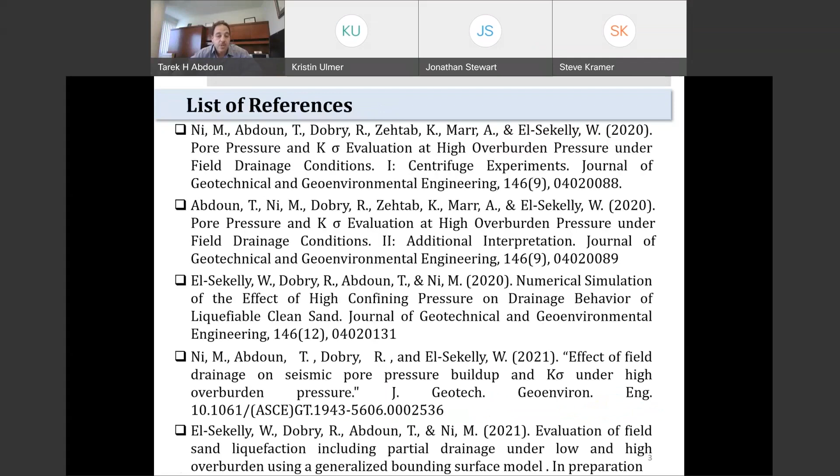I'll be briefly going over the research. This work has been going for the last 4 or 5 years. There are 4 journal publications which cover most of the topics. So if anybody is interested in more details of what I'll talk about, there are 4 journal publications, all of them in ASCE, and there is a 5th one currently in preparation, which will be coming soon.

This is the outline of the presentation. I'll start with a brief background on what was the motivation. I'll do that very quickly because everybody here is very familiar with the topic. As John mentioned, this is something of interest to us as a community. So I'll be giving just a brief introduction.

Then I'll start talking about our experimental work, which includes both single drainage and double drainage models, and analyze this data to get some insight on the values or factor of K-sigma based on the centrifuge results, as well as the soil properties, how they change. This coefficient of consolidation and compressibility depend on the confining pressure as you go. Finally, I'll be presenting some numerical simulation, which we ran using FLAC3D to try to get more in depth and evaluate also FLAC3D, which is commonly used in practice to estimate the response of liquefaction, both under low and high confining pressure. And finally, some conclusions and talk about our plan for continuing this work.

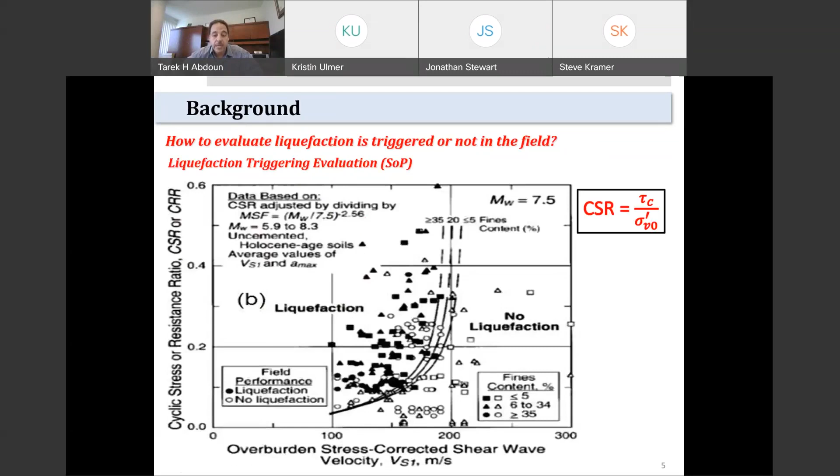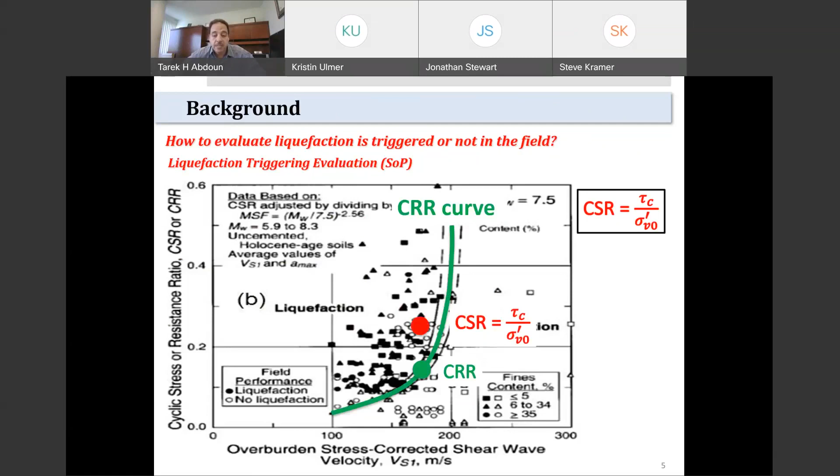So going to the quick background, how we evaluate liquefaction, everybody's familiar with this. It's basically using what we call liquefaction charts. Liquefaction charts can be based on shear wave velocity or CPT. More and more we are going to using in practice the CPT-based charts for very good reasons. But basically, both have the same concept. You are looking at what we call a cyclic stress ratio for the soil and compare that with the CRR, which is a cyclic resistance ratio curve. You have a curve which separates liquefaction from no liquefaction condition. You calculate your CSR. If it's above the curve, then that's an indication which is higher than CRR. That's an indication that the soil or liquefaction is predicted, is going to be triggered.

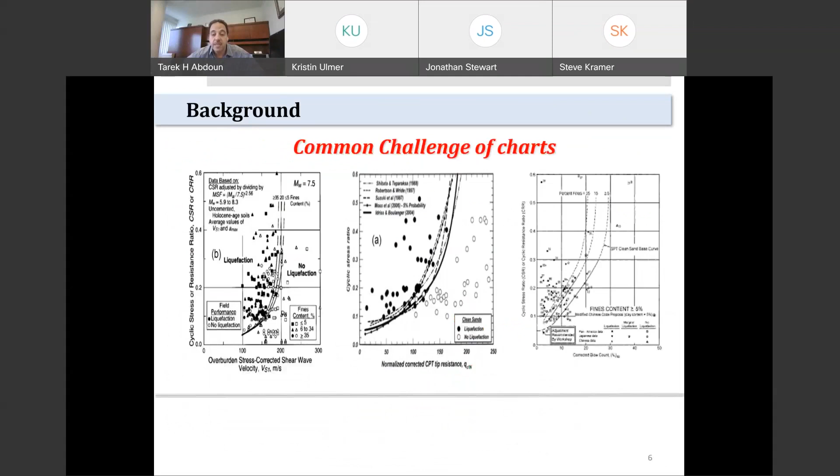That's the basis for using the chart. These charts have served us very well in practice. The only challenge with this chart is that they are more or less validated for shallow conditions, typically less than 1 atmosphere. There are a few points between 1 and 2, but in general the case histories compiled to develop this chart are all lower than 1 atmosphere.

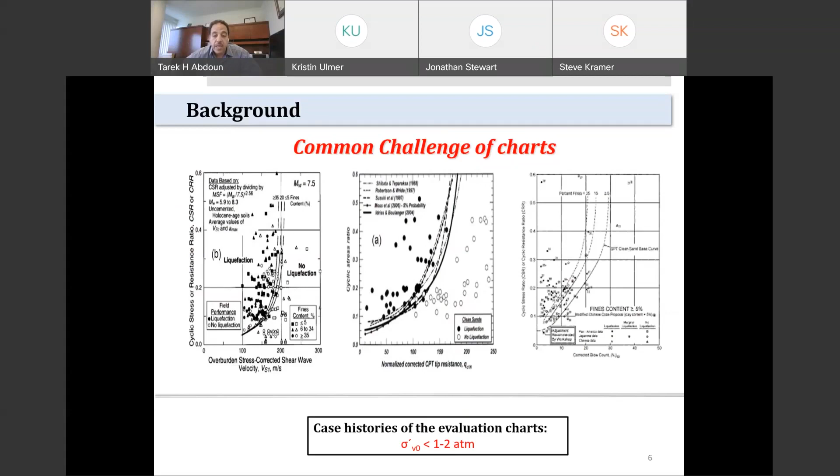But we have cases and conditions where the soil condition might be in the free field less than 1 atmosphere or around 1 atmosphere, but for the same soil, for a case like a high dam, if you calculate the confining stress, it's about 8 atmosphere or higher. So how can we evaluate the liquefaction potential, and are the same charts valid or not?

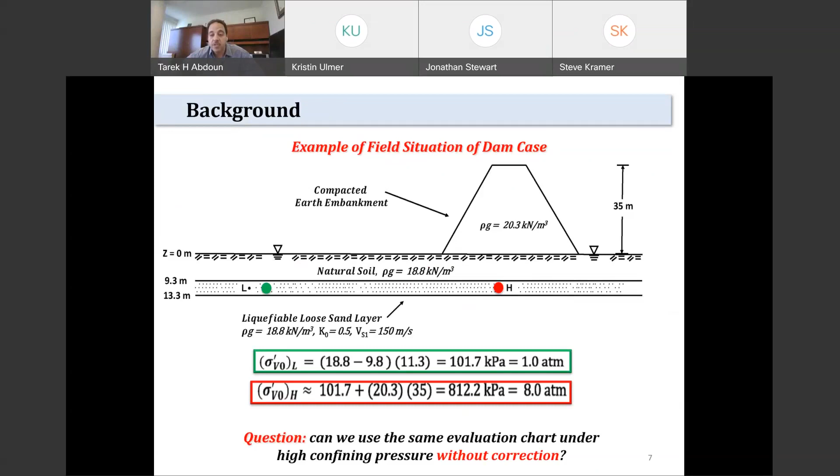There's a lot of work being done on that, and that was a question of interest at the last meeting with the National Academies Committee, looking into this, and they were looking for insight on how we can use this chart and the validity of this liquefaction chart curve at high confining stress.

There is a recommendation for how to use this chart. It's basically looking at the current curve and multiplying it by a certain correction factor, which we call the K sigma coefficient. Typically right now the K sigma coefficient is based on small scale testing, and the recommendation for K sigma is usually less than 1, which means the curve for CRR at 6 atmosphere is a lower curve, meaning the soil is weaker and has higher potential for liquefaction at high confining stress.

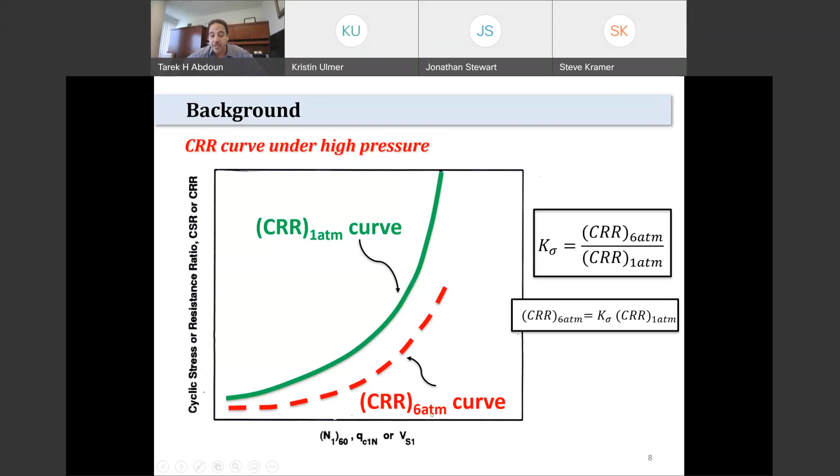There are two typical recommendations for this correction factor, K sigma, based on Youd et al. 2001, or the more recent work by Idriss and Boulanger 2008. Both give different factors under different soil conditions.

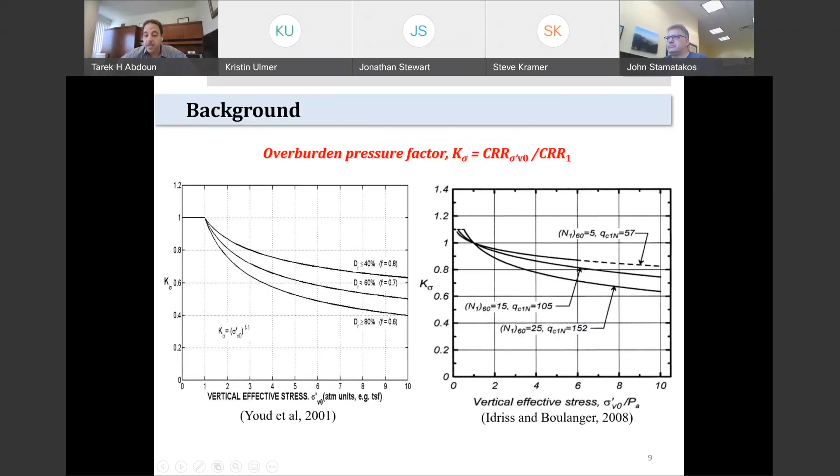If we take one as an example to get a feel for it, this is the curve for relative density of 60%. If we look at something at 8 atmosphere, you'll get K sigma, as I said, less than 1, ranging between 0.55 to 0.85 depending on which method you're using. So as you can see, there's a lot of variation between the two methods.

Also, as I mentioned before, there isn't really case history in the field to validate this. It's all based on undrained small sample tests, which is what's available for us to use, with no field cases. So this was mainly the motivation for this study, to get it started.

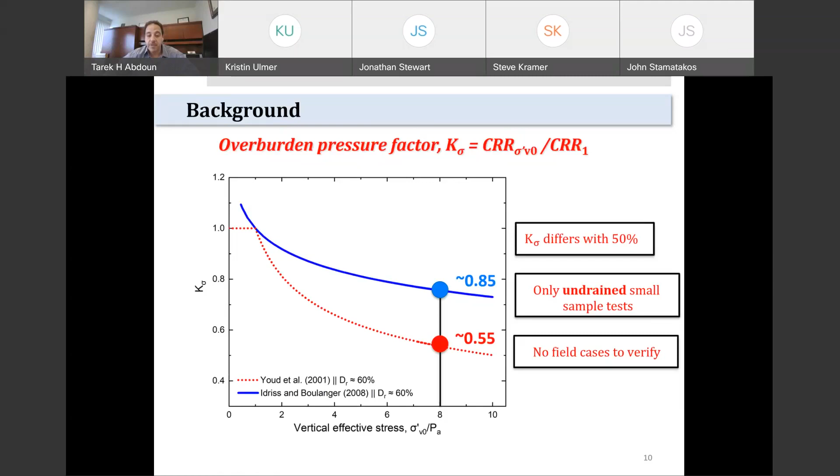We wanted to conduct centrifuge tests in this high range of confining stress to provide some field cases or case history to validate this method and understand more in depth the behavior of the soil under this condition. So we're really looking at what's the physics behind the phenomena as we liquefy and shake the soil and try to trigger liquefaction.

So centrifuge testing or simulation is very good for this kind of study because it gives a lot of insight on the physical behavior. So we conducted a series of centrifuge tests. I'll start by discussing the single drainage type of test.

So as we said, we are looking at comparing the behavior at low confining stress and high confining stress. Our work is mainly looking at doing tests at 1 atmosphere and 6 atmosphere. This is the setup, basically simulating a 5-meter prototype in the field.

It consists of a sand layer topped with a coarse sand layer, and on top of that, granular lead shot. It's basically particles made out of lead, so it's heavier to help with increasing the confinement, but it's the same size as the sand particles. So it's a granular material that behaves similar to soil.

We did two setups, one at 1 atmosphere, and the second one here on the right at 6 atmosphere. Both have the same prototype depth of about 5 meters of liquefiable soil. We vary the soil properties from 45% relative density to 80% relative density, so we see the loose and dense sand. It's heavily instrumented with accelerometers, pore pressures, bender elements to characterize the soil, as well as LVDTs. These models were built in a laminar container to provide the shear beam behavior and reduce the boundary effect.

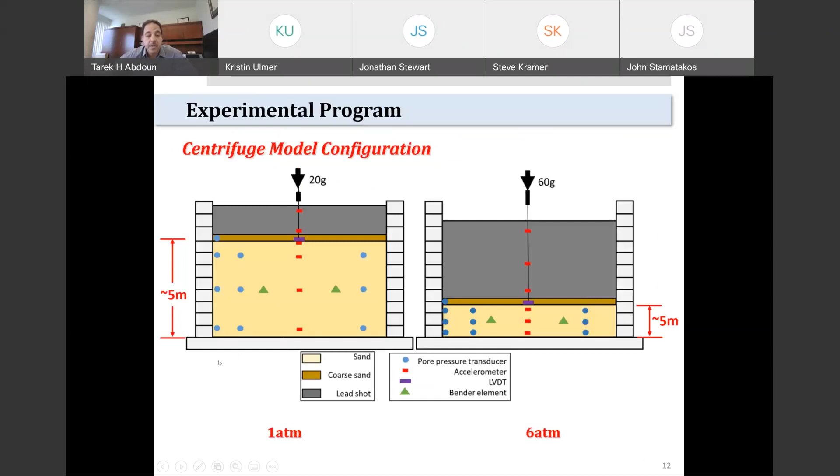All of them single drainage, as you can see here, it's only allowed to drain upwards. The boundary at the bottom is impervious. So you have 4 tests. The name of the test explains it. 45 is the relative density of the test, 1 is the confining stress, which is 1 atmosphere, 6 is the 6 atmospheres. And the second set of tests is 80% relative density, again 1 atmosphere and 6 atmosphere.

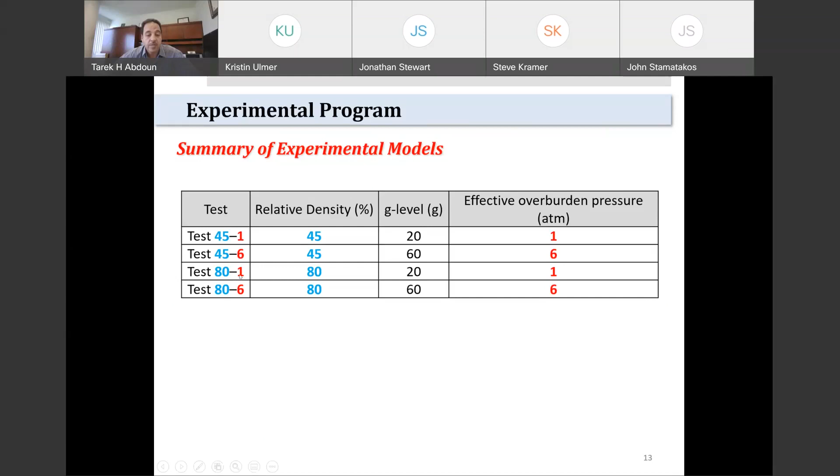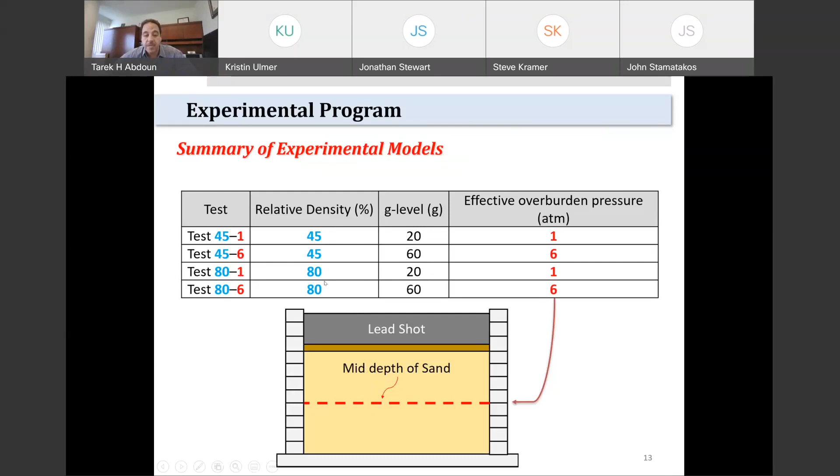The confining pressure is measured at the center of the layer, so it might vary a little bit as you go deeper or higher, but at the middle of the layer, where we focus on everything we are doing, is where we are measuring this value. And the relative density we're talking about is after spin up, so this is really at the high confining stress. These are the values of relative densities we have.

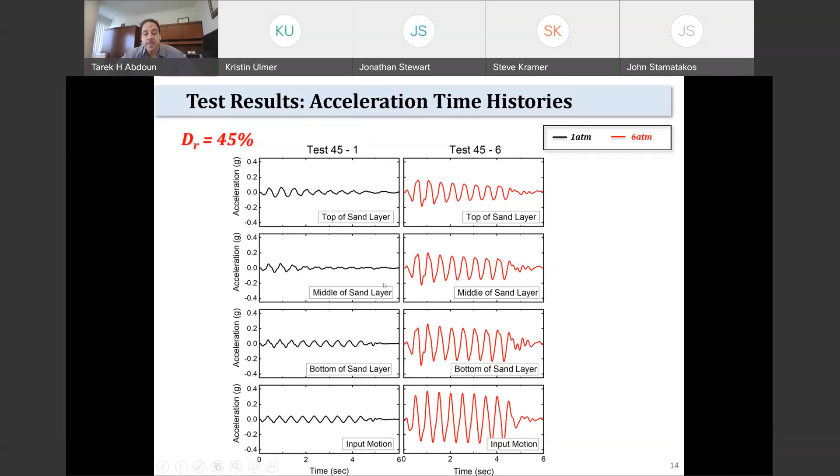And you can see how the acceleration propagated as the soil liquefaction develops or the soil softens, you can see the de-amplification of the acceleration.

This is a pore pressure buildup, looking from the bottom going upward in the liquefiable layer. As we said, we are targeting about 0.8 or 0.9, so this is about 0.8 or 0.85 measured at the bottom of both layers. So both of them reach the high value of RU we are targeting.

And you can see as you go at middle depth, the 1 atmosphere maintains a high pore pressure buildup, while the 6 atmosphere starts immediately dissipating, or couldn't even build up enough pore pressure. And again it continues with depth, so this is basically 0.8 or so at the bottom, and at the top about 0.4 RU. And for the 6 atmosphere, it's again 0.8 at the bottom and about 0.1 near the top.

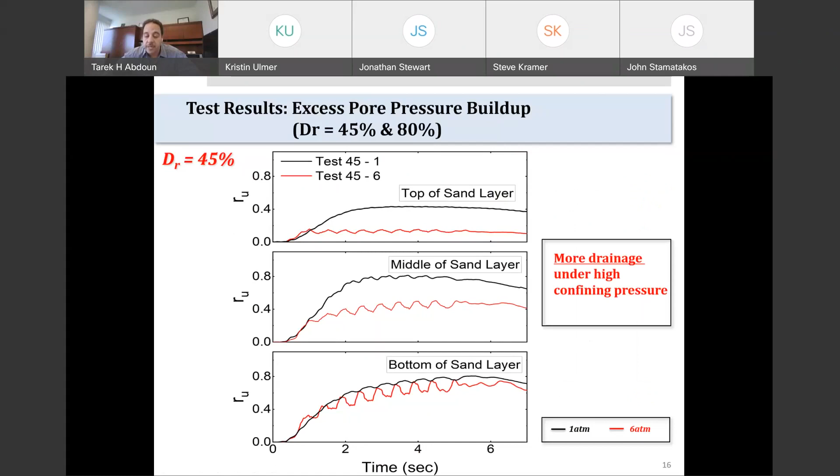So immediately from this result, we start seeing the impact or the effect of drainage. There was an indication of it, so we start looking in depth more into this, which would be clearer if we look at the isochrones of the pore pressure buildup.

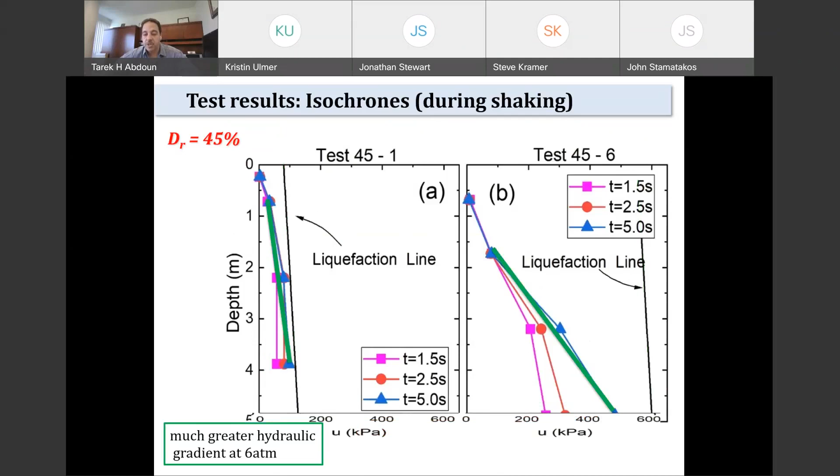So if we look at the gradient, as I said, it increases with depth in both cases. The maximum was measured at the bottom, but what's interesting for us is really the gradient of that isochrone. If we look at the hydraulic gradient, which is the slope of this isochrone, you can see that the gradient is much higher in the 6 atmosphere, and the gradient is 1 over the slope. So the higher the gradient, following Darcy's law, this means more drainage is occurring during the shaking of the model. That was the second indication that flow is moving from the bottom up during shaking for our test.

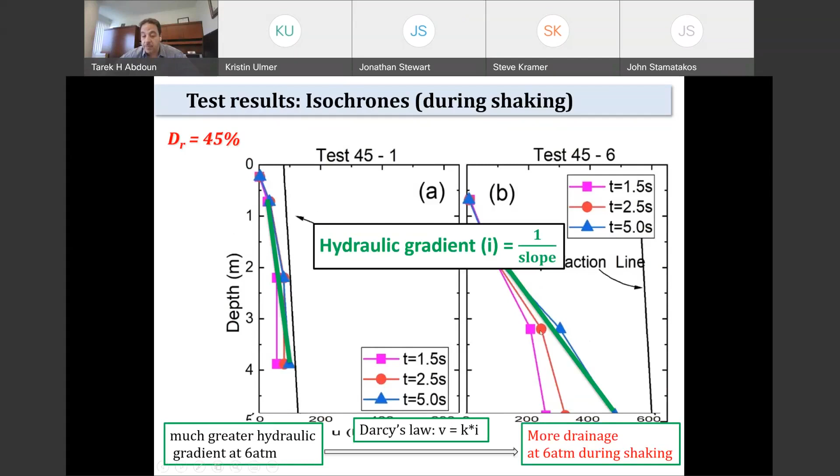We start looking into the results and comparing them with the small scale testing, which we have been doing with our colleagues at GEOCOMP. So we ran a series of stress and strain control tests at GEOCOMP using the same soil, and we did it for the relative density which we are using in the centrifuge, where in this case we are comparing with the 45.

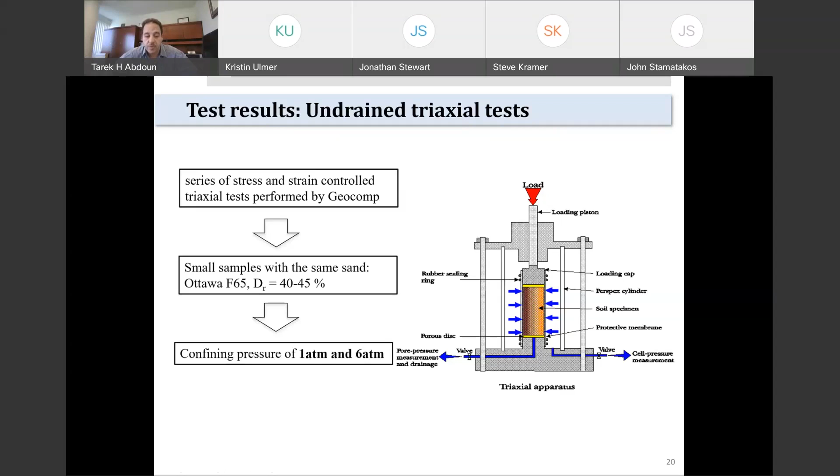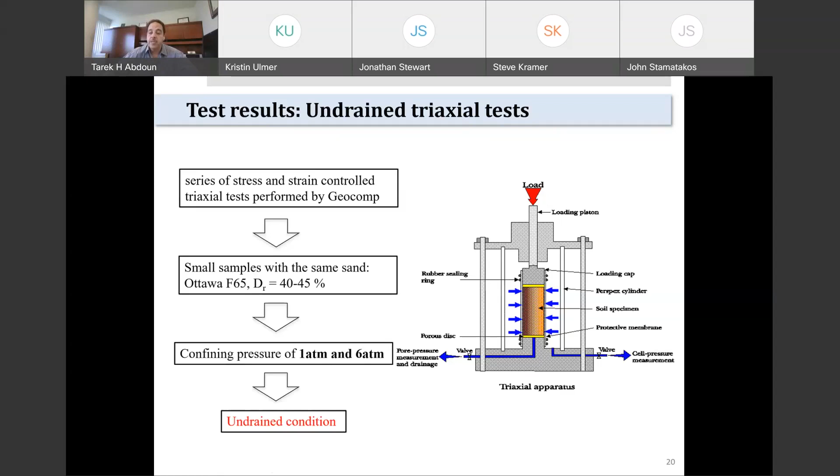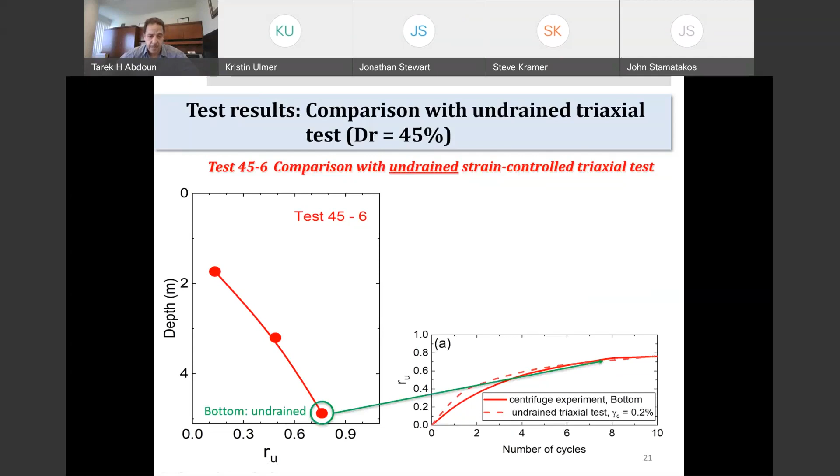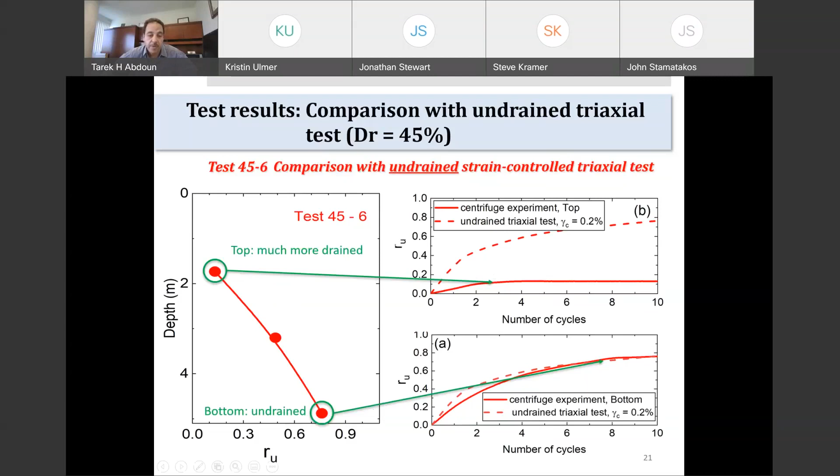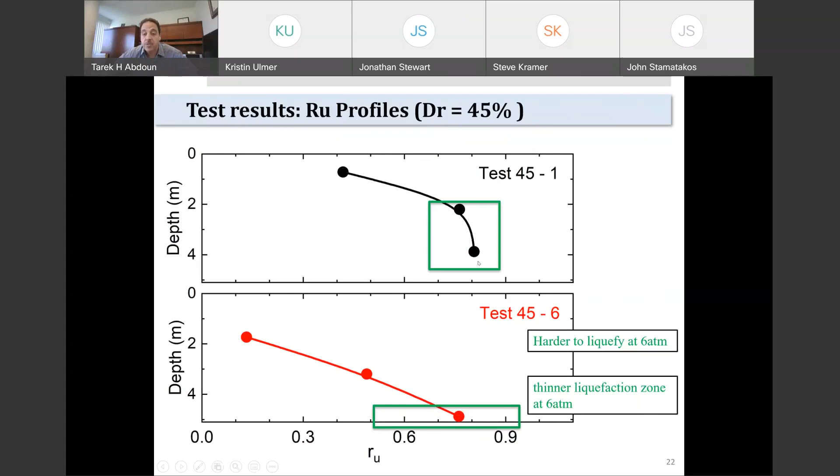Another observation, looking at the isochrones: in the 1 atmosphere case, the buildup of high pore pressure covers a zone of about 2 to 2.5 meters. In the 6 atmosphere case, it's almost a point near the impermeable boundary, with a very steep slope, basically draining quickly or highly. So the observation from this is that it's harder to liquefy at 6 atmosphere, based on what we observed from the centrifuge. And even if you reach liquefaction or close to it, the zone of high RU is much thinner than expected, or than what you'd get in a much shallower layer.

We took that further and started looking more into the effect of drainage. So we repeated this test, but now with double drainage, allowing drainage to occur both at the bottom and at the top. We repeated the same models shown earlier, again at 1 atmosphere and 6 atmosphere, but added a drainage boundary at the bottom, so now the soil can drain upward and downward during shaking. We repeated the same test with the same conditions and confining stress.

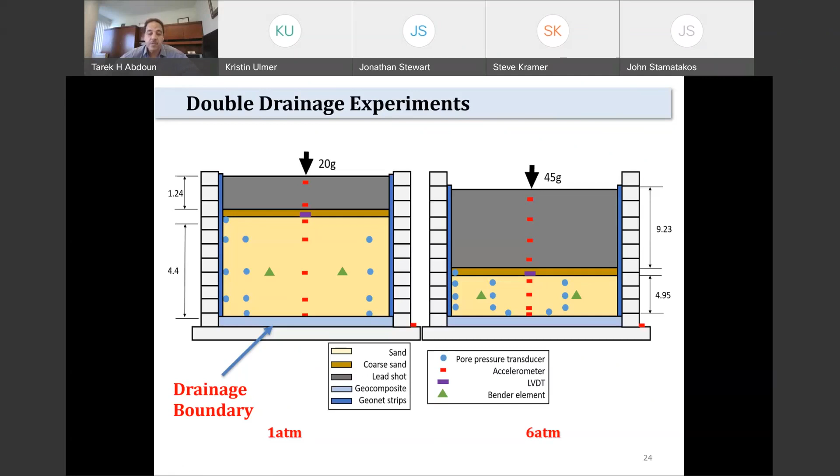We started by repeating the test with the same input motion, the same motion which generated almost liquefaction in the single drainage case. We used the same input as a starting point to see if we'd get the same buildup, or if the change in drainage would make a difference. This is the first comparison.

If we look at the 6 atmosphere case, for the same level of shaking but now with double drainage, initially you were reaching values of about 500 kPa. Here you're hardly reaching 100 kPa, so almost no buildup of pore pressure because of the double drainage effect. This shows a significant effect of drainage at high confining stress, more significant or apparent than what we saw in the 1 atmosphere case.

We repeated this test, though I'm not showing it here, to reach the high confining stress, but we had to apply much more input motion to build that up so we could calculate our K sigma. For the sake of time I'm not presenting that, but we repeated the same test with a new model version and used higher input motion. We were able to capture high values of RU, but as I said, it required higher shaking input.

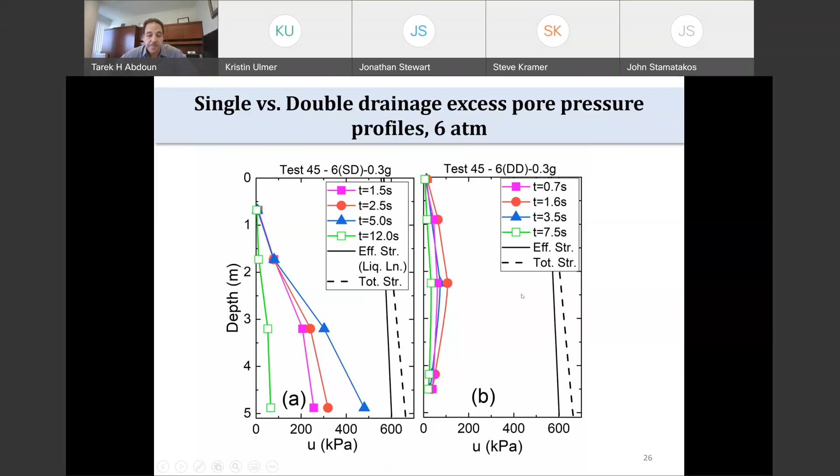So we used this data from all 8 tests to start looking into the values of K sigma based on the observation for the centrifuge, which simulates more or less the field condition.

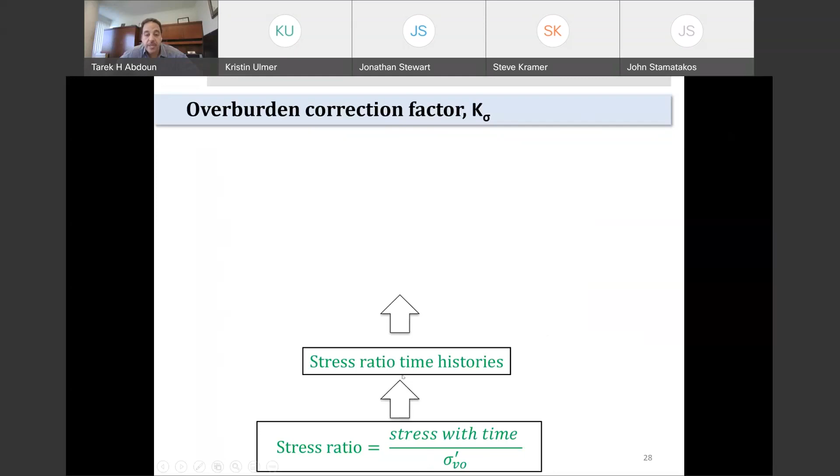Typically to calculate K sigma, just to refresh everybody's mind, you calculate the stress ratio, which is the stress with time over the effective confining stress. If you have the stress ratio histories, you can calculate your CSR, both for the 1 atmosphere and 6 atmosphere. So it's a direct calculation. And the ratio of this CSR at 6 atmosphere and 1 atmosphere will give you the K sigma.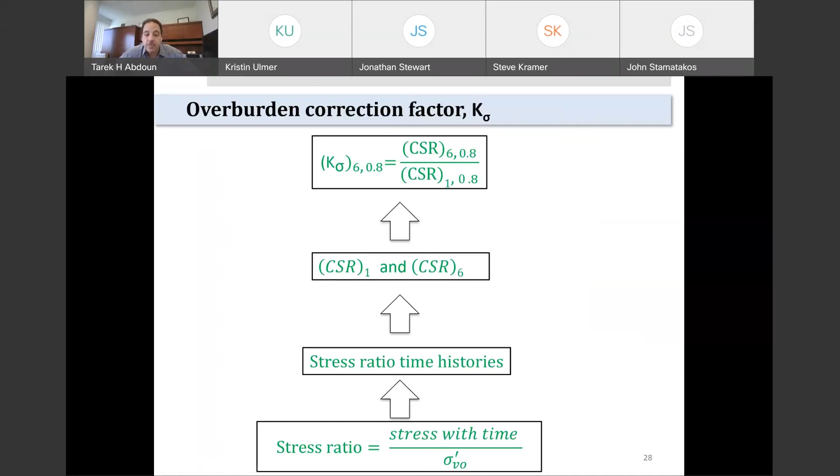So we use that to calculate K sigma for the centrifuge test. This is an example of the stress ratios measured in our test. Again, the black curve is 1 atmosphere, this is for the 80% relative density, and the red curve is 6 atmosphere. As you can see, the stress ratios in the 6 atmosphere are higher than the stress ratios for the 1 atmosphere, which is opposite to what is being estimated based on the undrained behavior.

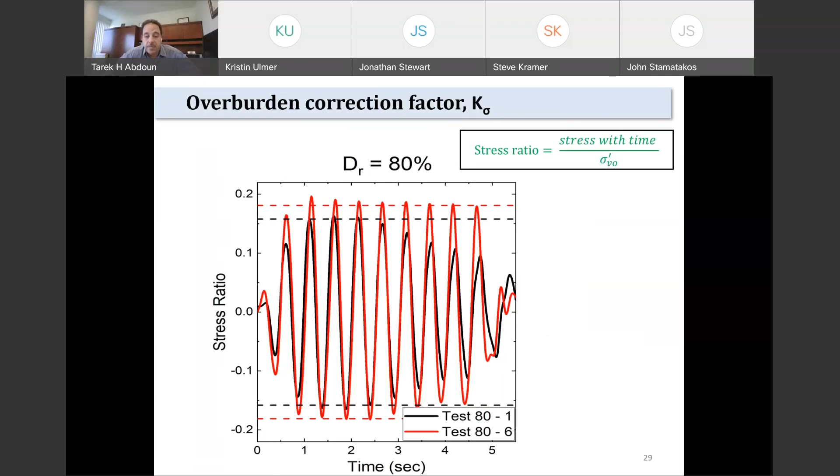So if we take these values, and again we did it for the 45% and the 80%, and use that to calculate the K sigma, you get values of about 1.3 and 1.15, depending on the condition. This is all for the single drainage.

So it's obvious from this measurement that the higher the confining pressure, the soil is draining faster, and we'll look into why that's happening. Because the soil is draining faster, you are not building pore pressure as fast as being estimated based on the undrained condition.

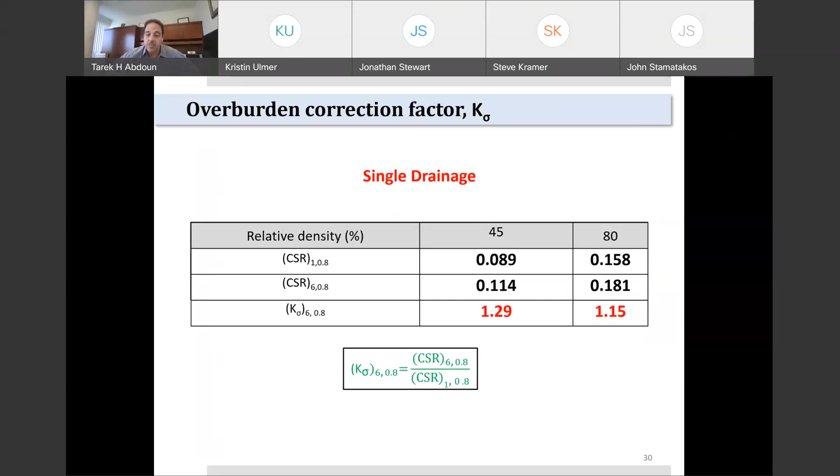So we compare these values. The blue values are what's being estimated with the current curves from state of practice. As you can see, if we look at the 45, what we get from the centrifuge is about 1.3. The current K sigma values are about 0.7 or 0.85.

We went back and calculated what K sigma would be if we use our undrained triaxial test. So if the assumption of undrained behavior is valid, what would K sigma be? The values are very comparable to what's being given by Idriss and Boulanger, about 0.85 or 0.84. For all practical purposes, it's the same number.

So basically the issue is the method is correct, but is the assumption of undrained the right assumption for high confining pressure? Based on the observations, it's very valid and stands strong for low confining pressure. But as soon as you go to high confining pressure, it might be a very conservative assumption. To assume the soil is still undrained is conservative, not utilizing the soil behavior to the fullest. The soil is draining, and if it's draining, it's reducing the potential for liquefaction. That's why K sigma being measured is higher than 1.

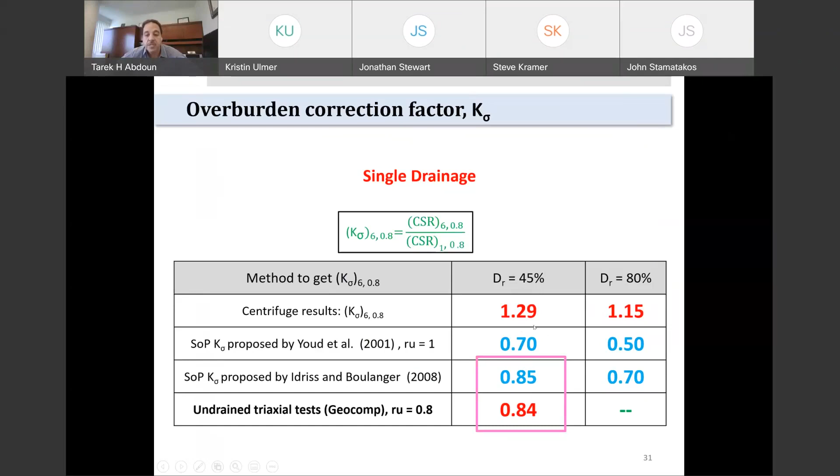So we use that as an exercise to look at how that would impact the prediction of whether the soil will liquefy or not in our test. Again, the centrifuge test is like a case study. We use the CSR we have for our centrifuge test at 6 atmosphere and divide that with the K sigma values, both from the chart as well as what we calculated based on the centrifuge. If we use the chart, that would estimate that the test we did would liquefy.

And if you recall, we never liquefied. We reached high RU, but we never liquefied. If we use the measured K sigma, it predicts that the tests we conducted are not expected to liquefy, and that's really what we observed. We reached about 0.8, and actually it reached that only at the boundary. The rest was much lower than that. So it certainly didn't liquefy in that test.

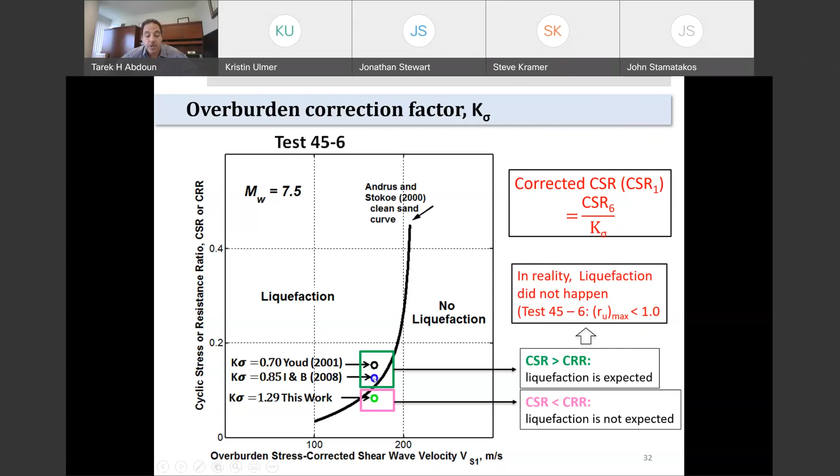So that gives you a feel for how that K sigma value might make a difference in predicting if the soil is going to liquefy or not. You might be conducting unnecessary remediations in certain conditions because of underestimating the values for K sigma.

This is the same table from before. We added to it the value from the double drainage. As I mentioned, we did the tests again and we reached the high RU values, and we repeated the same process, and you get K sigma again about 1.3 for the double drainage. So it confirms what we have been observing, the single drainage is also being shown in the double drainage.

So in quick summary of what we have observed in the centrifuge test, K sigma seems to be higher than 1 because the soil behaves more drained at high confining stresses.

K sigma decreases with relative density. That's the same trend the charts from the state of practice show, which confirms that trend.

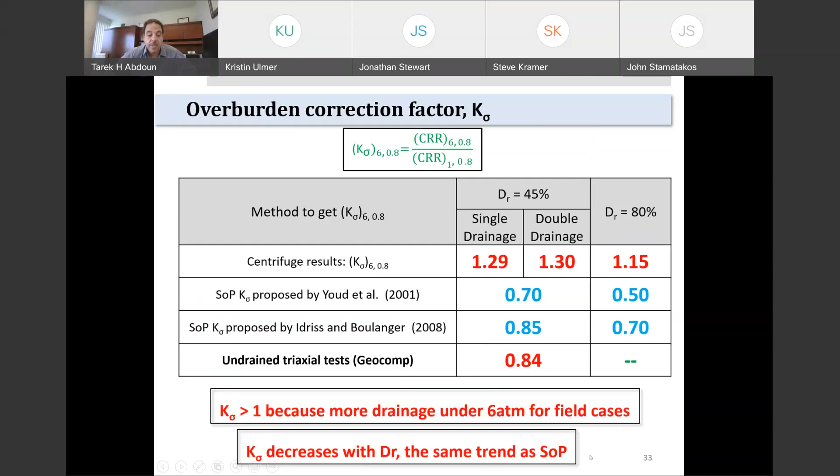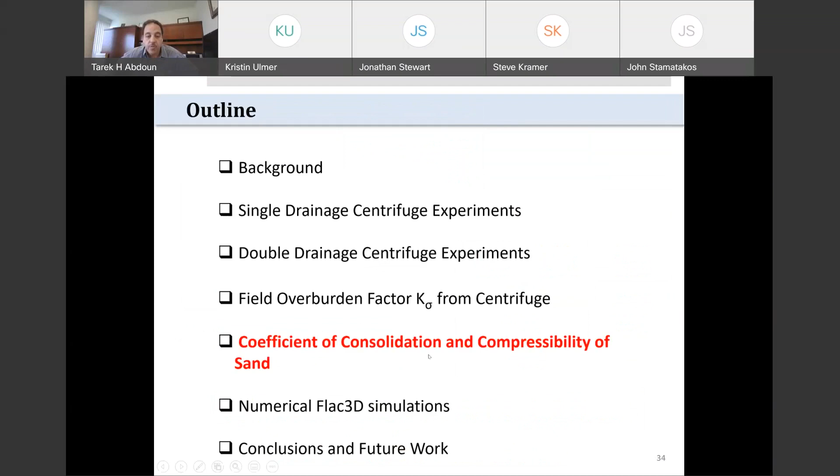If the soil is behaving more partially drained, then the stiffness of the soil or the coefficient of consolidation would play a very major factor. So we started looking into what values we have for the coefficient of consolidation, because the CV values we calculate from the physical test or the centrifuge should be consistent with the behavior of whether the soil is draining or not. That same trend has to be shown in the centrifuge to give credibility to the results.

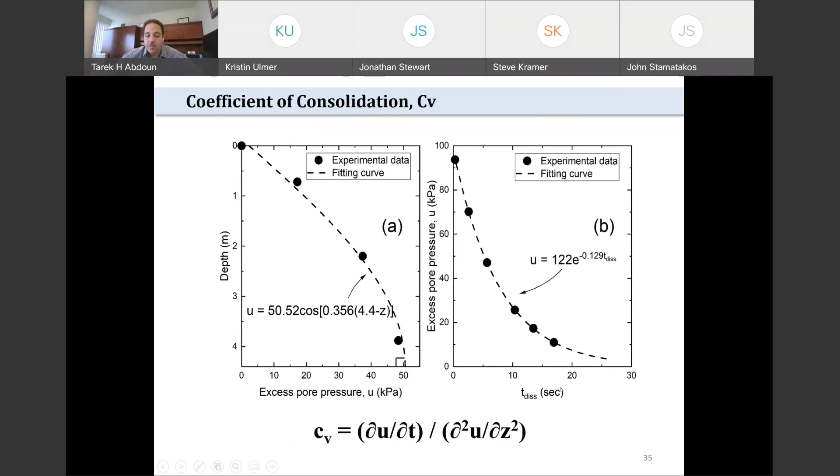So we went back to basic soil mechanics to see if things add up and all the puzzle pieces fit together. We used the data from the centrifuge to calculate the CV using consolidation theory. On the right-hand side is the dissipation curve, which we used to get the time for the soil to consolidate, and from that calculated our CV value.

If you have CV, you can calculate M prime, which is a volumetric stiffness, both for 1 atmosphere and 6 atmosphere, and we did that. Based on basic soil mechanics for sands, it's supposed to be around the square root of the change in confining stress. So for our case, for 6 atmosphere, the change in CV or M prime between 1 atmosphere and 6 atmosphere should be about 2.5 times roughly.

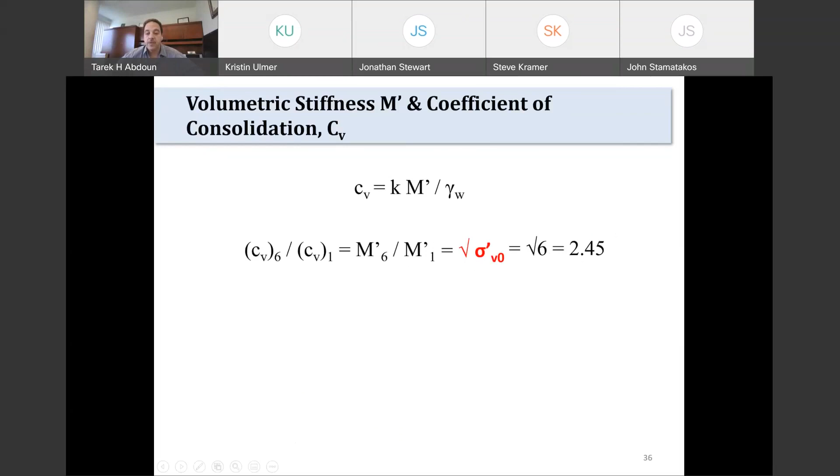We did our calculation for CV and M values in the centrifuge, and for all the tests they varied somewhere between 2.4 and 3.2 or 3.4. As an average it's about 2.7, which is very comparable to the value from basic soil mechanics. This explains that the higher the stiffness of the soil, the faster it drains. That's why soil at high confining pressure, even the same soil at the same relative density, is much stiffer and drains much faster.

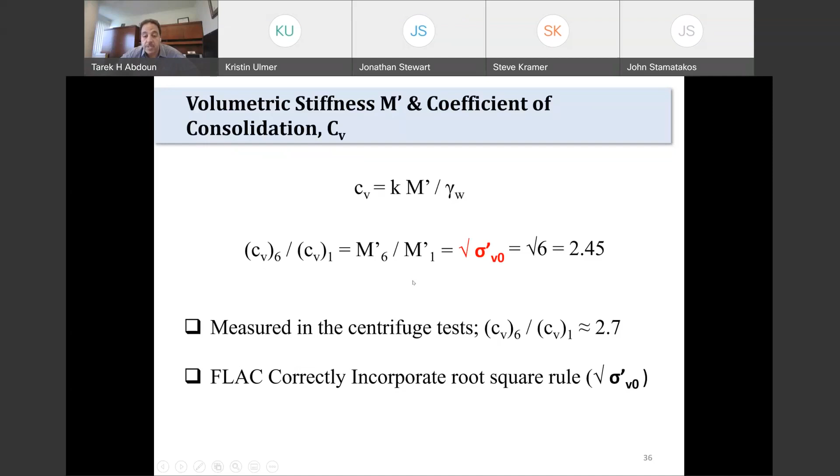We were also interested in using FLAC for the simulation, since that's what most people use in practice for liquefaction prediction. FLAC correctly incorporates that square root rule, so for the same soil at the same relative density, the value for CV or M prime changes by the square root, which is already built into the code, so you don't need to make any correction. It takes that into account, and we'll see that when we look at some of the simulations done.

We wanted to develop a way for practitioners to use this method to properly estimate the stiffness of their sand, without needing to run a centrifuge test every time. So the GEOCOMP team is leading an effort to develop a new test, a triaxial sand compressibility test, to be able to predict this value.

This is a result from this new procedure they're developing, where they run the triaxial test undrained, and after reaching high RU, they open the drains and let it consolidate while measuring the change in stiffness or volumetric change of the soil, estimating the volumetric stiffness. This work was led by the GEOCOMP team, but I wanted to show that we're also looking into providing tools for practitioners to use this information, so they don't need to go through a complicated centrifuge test every time, but can get the same information using a triaxial test, slightly modified in how it's run.

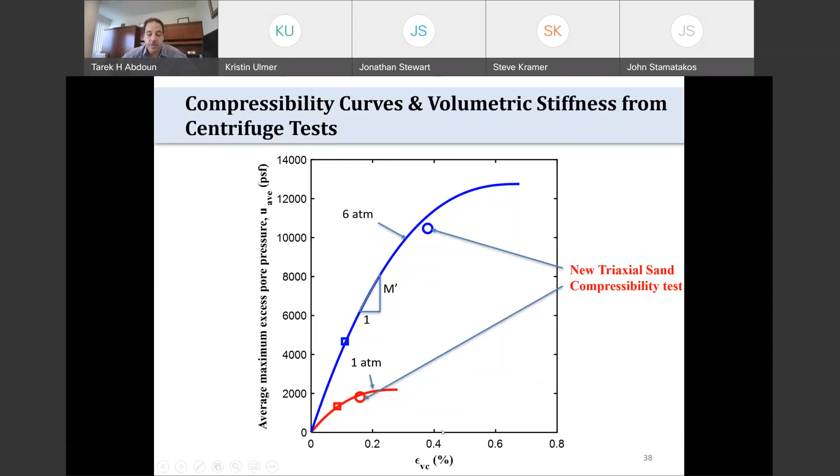So looking now into the numerical simulation, as I said, we used FLAC 3D. We wanted to simulate our test and see how current numerical methods would be able to properly simulate the behavior of our centrifuge test. So we started with a single drainage test, and that's what I'll talk about here today.

So we did 1D shear beam soil column simulation for the 4 tests, which are single drainage, both at 1 atmosphere and 6 atmosphere, 45 and 80%. We used the cyclic triaxial test along with the centrifuge data to calibrate the FLAC code to start with.

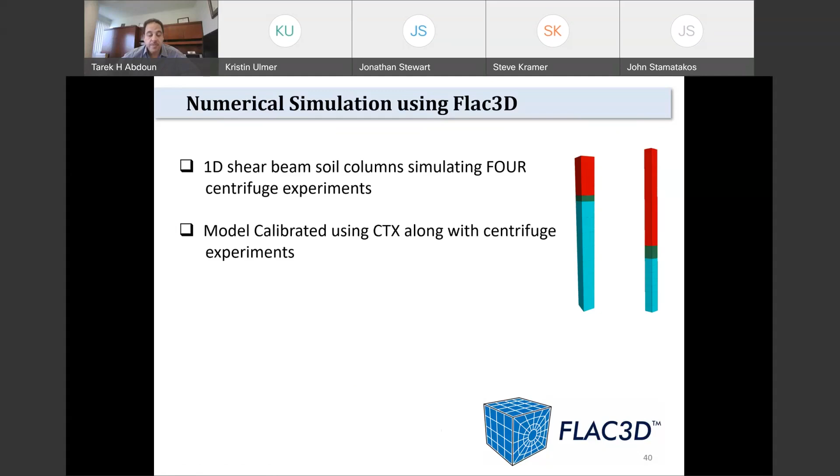We ran the simulation, both fully coupled effective stress analysis and no flow analysis. Fully coupled is basically, in simple terms, allowing for the water to flow during the shaking, during the simulation. No flow is basically running it undrained. Typically, people run the no flow because it's much faster, and we'll see how that assumption works both for the low confining and high confining stress.

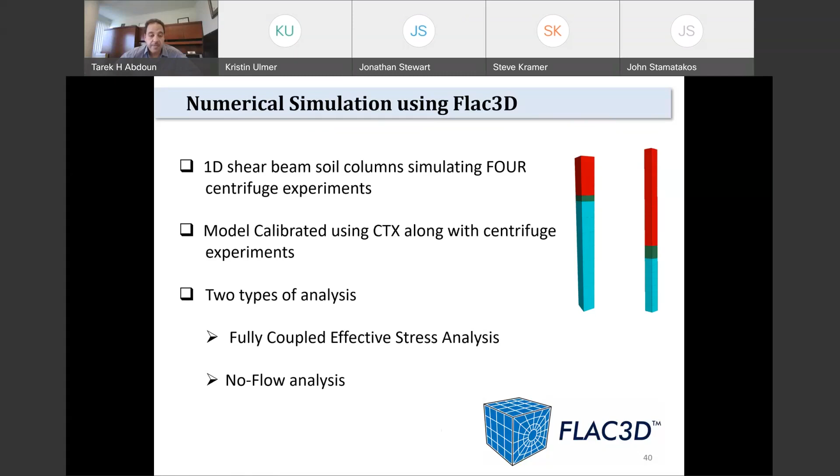Started with what's recommended by the FLAC team, and we did a few changes to a few parameters. These parameters are kept constant from now on. So for the other 3 tests, we didn't change anything. As I said, FLAC itself accounts for the change in confining stress, so we didn't even need to change the model stiffness, the M prime or CV. And the same thing for the 80% relative density - all we did is change the relative density, and we didn't change any other parameters.

We then ran the simulation again, same parameters, but now we didn't allow for the flow to occur - we did the no-flow. As you can see, this is the comparison you get. For the 1 atmosphere, it's pretty good, the comparison seems decent, with very small variation near the surface. If you look at the 6 atmosphere no-flow case, you can see it way over-predicts near the surface, under-predicts at the bottom, only close to the values near the middle.

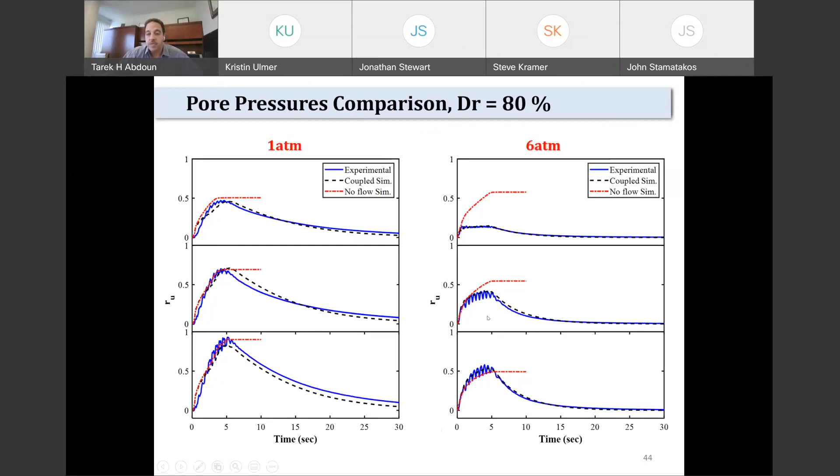So really, we have the tools seemingly giving the right values if we run the proper simulation. If we do it again, now closing the flow, we get a very good comparison at 1 atmosphere. And I think that's what we've been guided by, because this is where we have a lot of case histories, and people from practice have seen that if you run it coupled or no-flow for the low atmosphere, it seems to give pretty decent values. That's where we didn't have much experience, but it looks like the values are very different when you go to high atmosphere - it makes a difference if you run coupled or no-flow simulation.

This difference is even more significant when you get into the double drainage - this was single drainage. So at least from what we observe up to now, and this is a work in progress right now, it looks like it's a big difference if you run the simulations no flow versus coupled flow in reality.

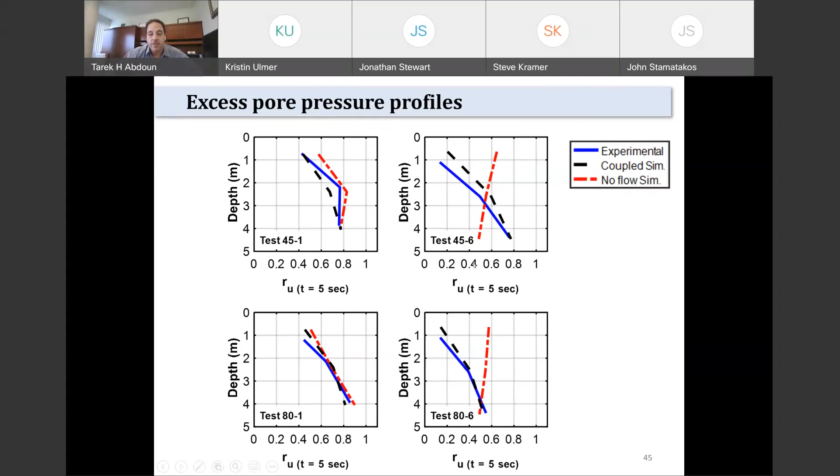So some observations and conclusions, and some discussion about future work which we are planning for. We developed a new centrifuge technique to study liquefaction at high overburden pressure, and it seems to be providing some useful insights on the behavior.

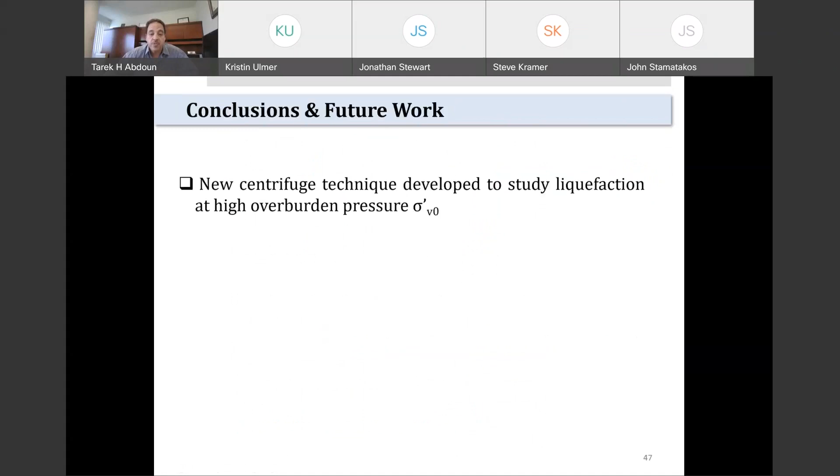Clean sand at high sigma V is less compressible, it's more stiff, and that's why it drains faster during shaking than what you observe in the behavior at low atmosphere, 1 atmosphere or lower.

Centrifuge results confirm undrained behavior for low overburden pressure. So as we showed, based on the experiments, what we have believed - that assuming undrained behavior for low confinement seems to be valid - but it indicates more drained behavior of the soil is being observed at high overburden pressure.

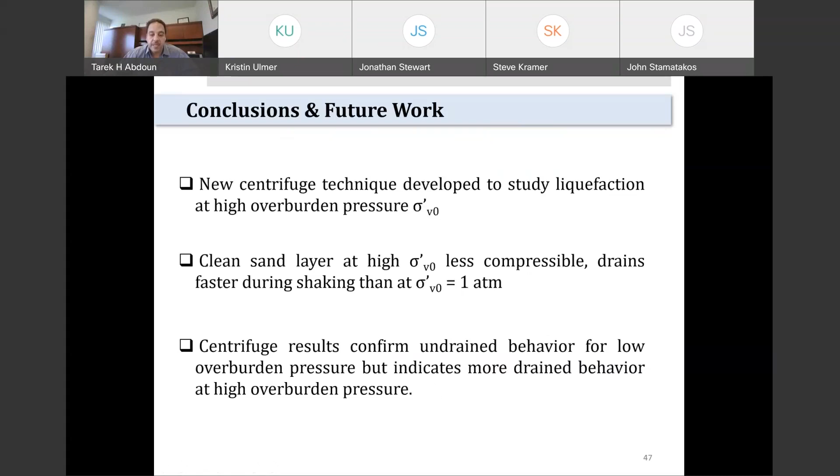As I said, we have seen that from the experiment, from the comparison between the centrifuge as well as undrained triaxial, from the basic soil mechanics of how the soil compressibility or stiffness is changing with the increase in confining stress.

For partially drained field conditions, field K sigma is usually measured as higher than 1. That means it's harder to liquefy at high sigma V rather than easier. So the assumption that K sigma for high confinement is less than 1 means it's easier to liquefy.

What we have been observing, or what's indicated by the centrifuge result, is that because of the drainage occurring, K sigma is actually higher than 1. And even if liquefaction occurs, the zone is much thinner under high confining stress.

So I know also in practice it's important how big that layer is. So even the thickness of that layer - it's not the full layer, it's typically a small zone - because things seem to be draining.

As we mentioned, M prime and CV are proportional to the square root of the confining stress. For those partially drained field conditions, that means K sigma increases instead of decreases with the increase of sigma V.

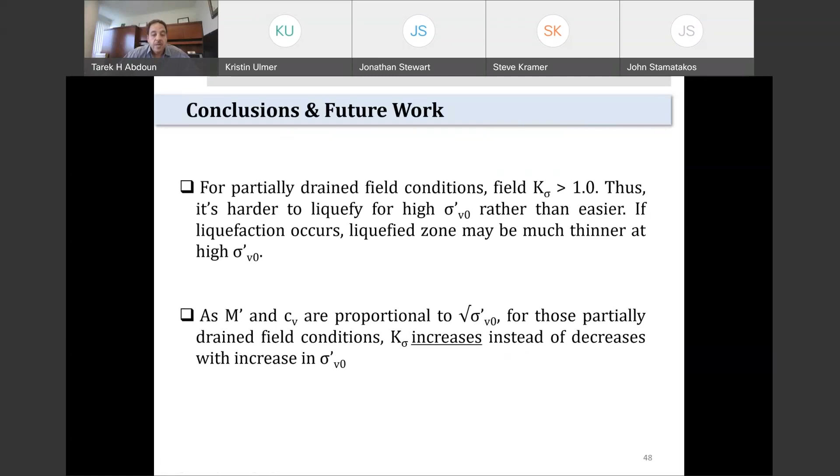Finally, as I said, this is a project which is a work in progress. We have been working for some time now on it, but we are halfway through. The plan is to do additional centrifuge tests.

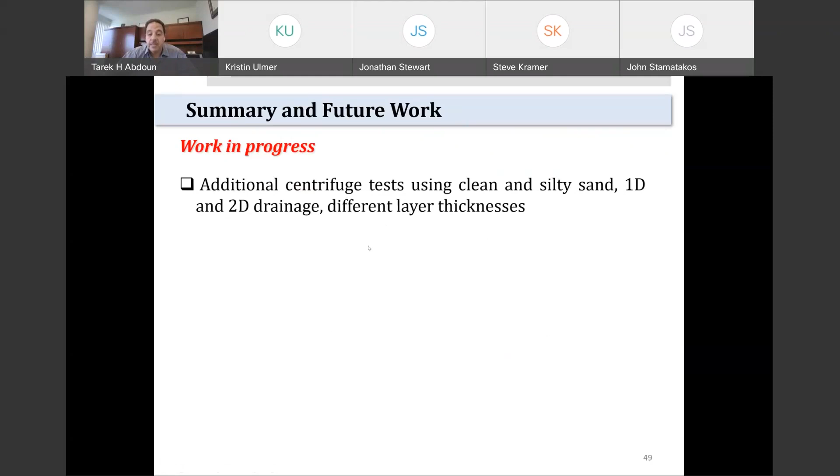We are starting to do silty sand. So we want to validate, look at, and learn the behavior also in the condition of silty sand, and also vary the thickness of the liquefiable layer.

We are planning a numerical study to try to widen the range of data for understanding the behavior. So we'll use numerical models calibrated with our centrifuge tests, the 8 tests we have, and broaden the range by looking at how the behavior can be predicted with this numerical simulation.

Then finally, we are hoping to provide guidelines on when the K sigma in the field would be assumed more than 1, and basically the validity of the chart - when we should be assuming that the CRR chart needs to be reduced or kept as it is.

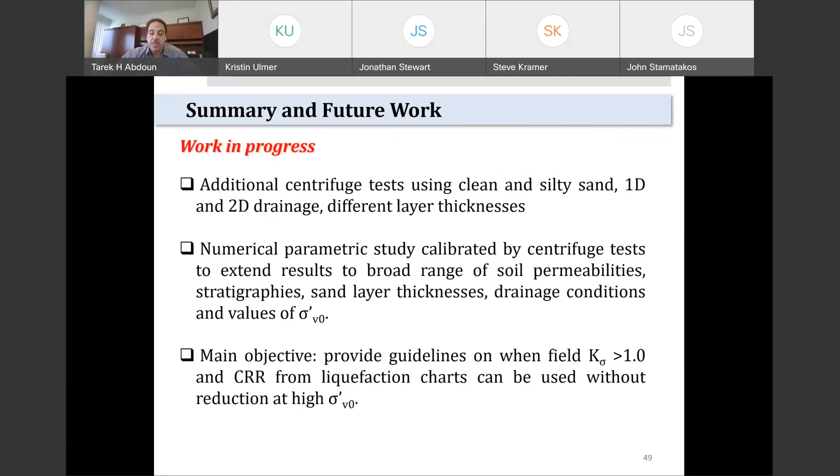And again, we are in the progress of learning more, but the indication we have up to now seems that CRR doesn't need to be reduced, at least in the cases we have looked at. With this, thank you very much for listening, and look forward to any questions.